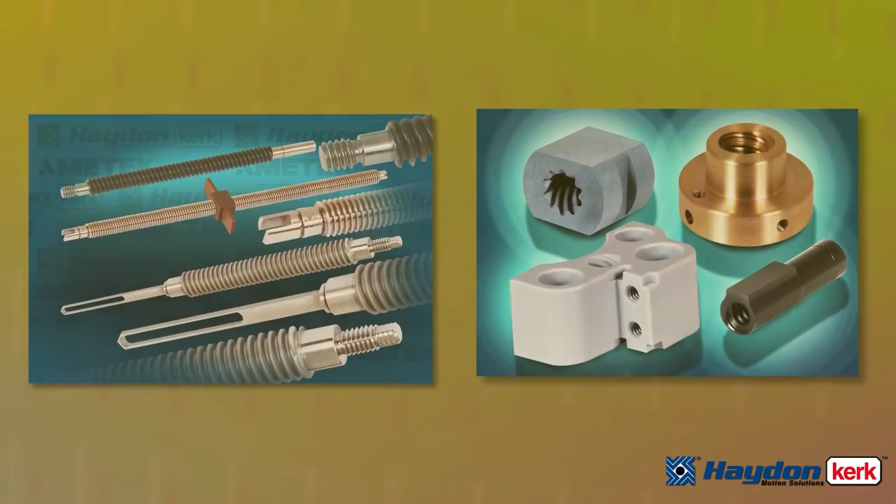Haydon Kerk hybrid linear actuators are available in frame sizes ranging from our smallest, approximately 0.8 inches square or 20 millimeters, to our largest, approximately 3.4 inches square or 86 millimeters. Double stack hybrid linear actuators are also available in certain frame sizes.

All our actuators are available in 3 different mechanical configurations: captive, non-captive, and external linear. The captive configuration is a self-contained unit with built-in anti-rotation, but it's limited to shorter stroke lengths. The non-captive and external configurations are perfect for longer stroke lengths, but they need to be mounted using a method that will ensure anti-rotation.

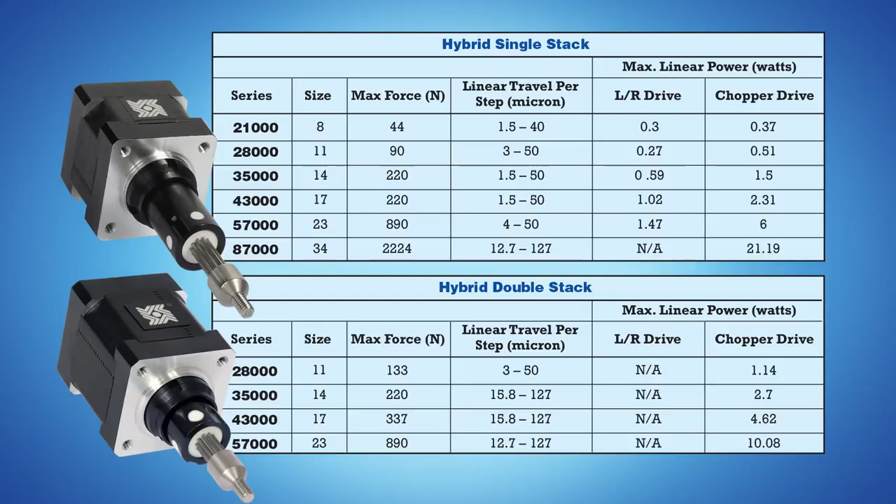These devices are capable of a linear output force ranging from approximately 10 pounds to 500 pounds, or 44 newtons to 2,224 newtons. The output speed range of a particular actuator is dependent on several variables, including the type of stepper motor drive, as well as the voltage rating of the motor coil and the maximum output voltage capability of the drive. As seen in the chart, maximum output will be obtained using a chopper drive with about an 8:1 drive-to-actuator voltage rating.

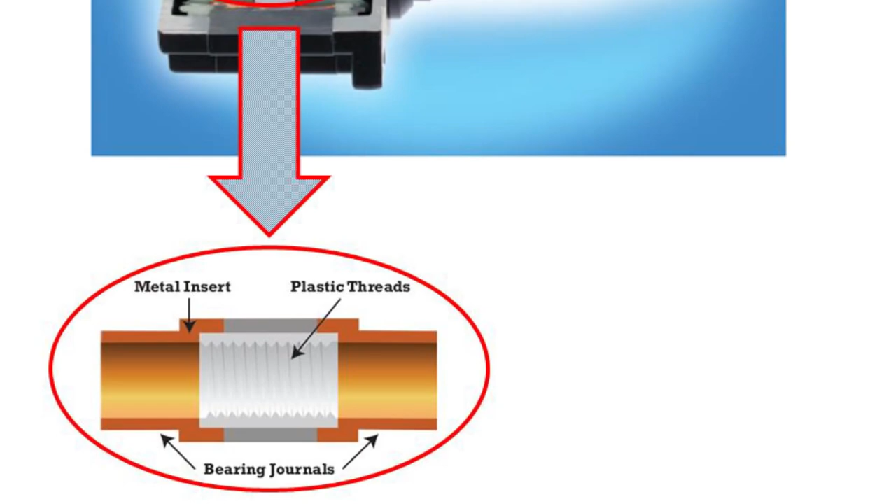Our captive and non-captive linear actuators use an internal nut to convert rotary to linear motion directly within the motor itself, making these devices quite unique compared with conventional rotary stepper motors. In this cutaway, you'll see the magnetic rotor and bearings are mounted on the internal nut assembly. This assembly is made from a combination of polymer and brass. This is a larger version of the same nut design found in the cutaway.

Let's look at why it's important to use 2 different materials for the internal nut assembly. As illustrated in this chart, the coefficient of friction is almost 2 times more when using a bronze lead screw nut compared with a plastic nut. Plastic is the clear choice for minimizing system friction.

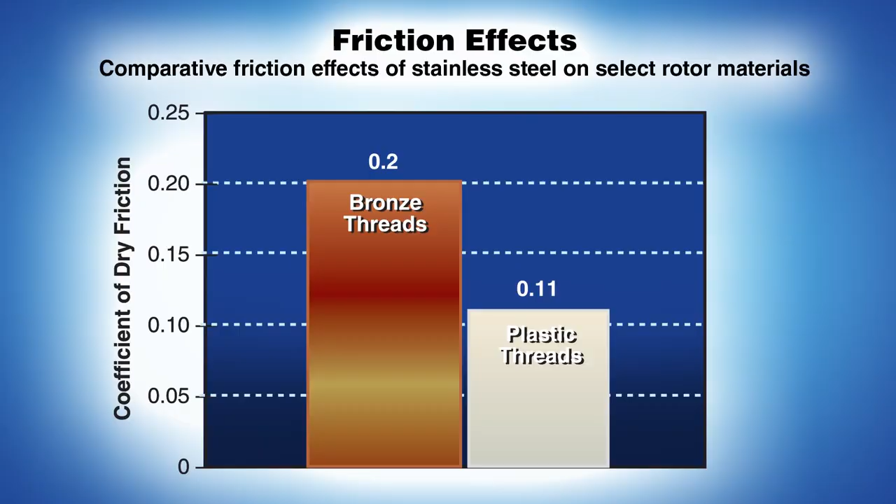On the other hand, as good as plastic is for lead screw nut threads, it's not a stable enough material for the bearing journals of a hybrid stepper motor. In order to achieve the high performance characteristics of a stepper, the design must maintain very tight tolerances for the stator to rotor air gap. This tight design requirement demands thermally stable bearing journals.

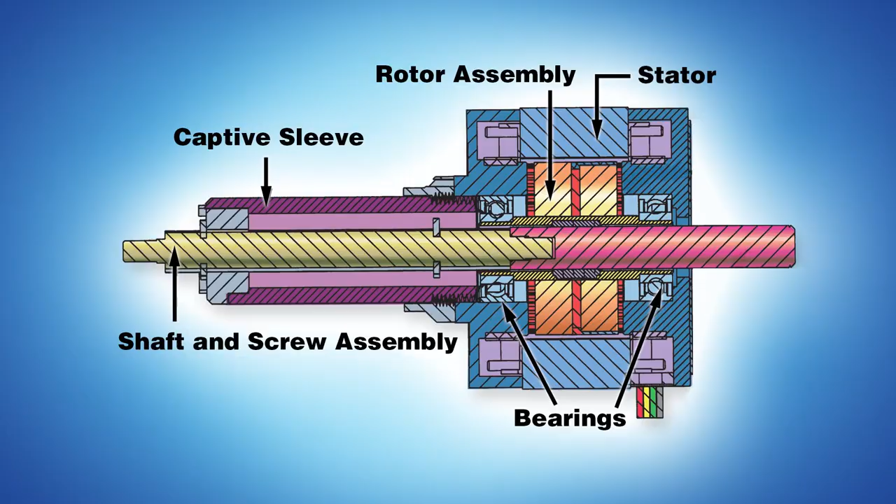This chart illustrates the thermal expansion of a 1-inch sample of both plastic and bronze. At 130 degrees F, the bronze material remains dimensionally stable, while the plastic material changes significantly. The thermal expansion curve for the plastic material also slopes up much more than the bronze material over a wide temperature range.

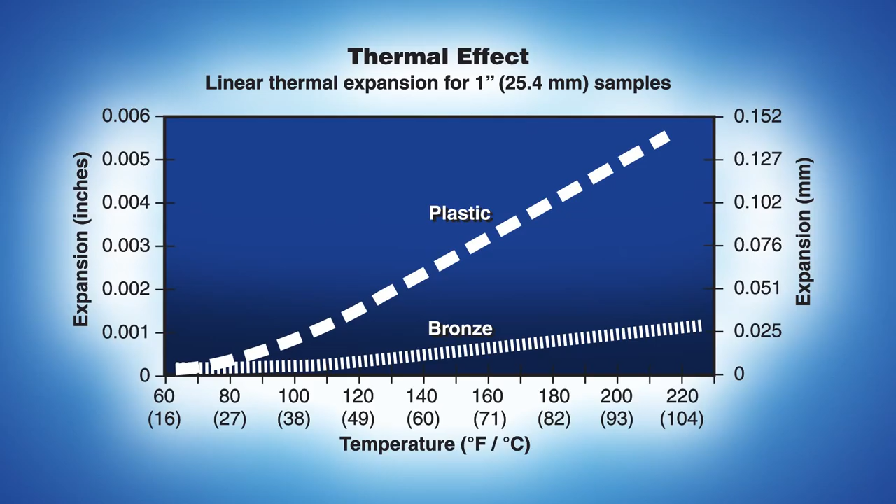By injection molding plastic threads with a brass sleeve with precision machined bearing journals, both requirements of a low-friction screw nut interface and bearing journal temperature stability are achieved. The result is an actuator with quiet operation and high efficiency compared with one using the traditional bronze lead screw nut.